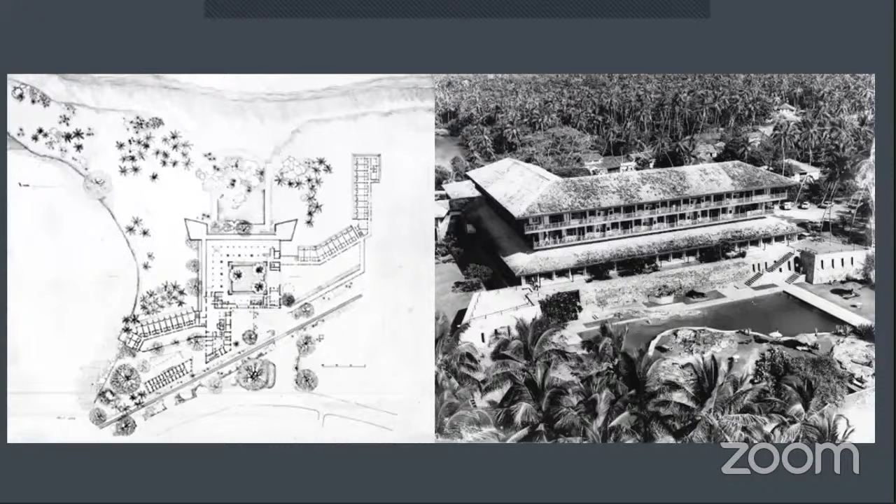Now, if you see this aerial photograph, this is taken from the beach side. This was the hotel that was built in 67 to 69. And it had a lower ground floor, which was connected with a ring of galleries. And what you see here, these protrusions were acting as bastions, like what you see in the photograph, stone bastions, and the stone bastions were connected with a ring of galleries right around.

And that ring of galleries was partly retaining the sand, because it created this upper platform. So this upper platform was supported by a ring of retaining walls, which also acted as the galleries, and these bastions were also designed by the architect as a feature.

So at the upper level, when you come to the hotel, you get down at the lower ground floor and climb up and get into the upper level, which is shown in this photograph. This is the upper level. And the two levels above, which is sort of an L-shaped building that you see in the photograph, were the residential facilities.

Also, you can see this original plan. By the way, this plan is 50-odd years old. The two room blocks that were there, the single-story room block, connected to the building. Right.

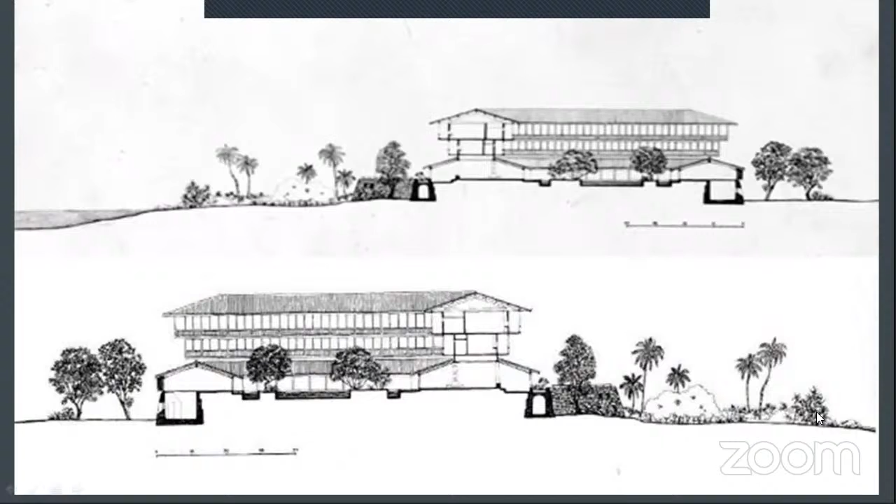Now, moving on, these are some of the old photographs of the building, again taken in the 60s. That same entrance that I showed you, the close-up. And you can see some light there. That is the entrance steps going up to the entrance lobby. You drop yourself at the lower ground level and climb up to the upper level, and from there to the guest area.

Another view of the same building. At a distance, you can see the stone walls, and you can see this cantilever of a cantilever effect on all sides. That was a unique feature which is maintained in this building.

We'll move on. This is another photograph of the old building. The single-story block, the room block that I mentioned, this is the place where they had it. And this is the main building again. And this is another aerial photograph that shows the river and the Indian Ocean. And this is the old Galle–Colombo road with a rail line here.

So these are all very nicely preserved photographs which we thought we'd share with you, from before it was developed. Right. Now, one of the last old photographs I'm going to share with you.

You can see this cantilever of a cantilever effect, but mind you, these are all timber-cladded concrete columns we had used. Timber cladded, very thin concrete columns. What he has done is basically suspended the cantilever, the slab here was held by these columns and taken to the upper level. It's beautifully done in a very creative way by, I think at that time, the engineers who were fixing it.

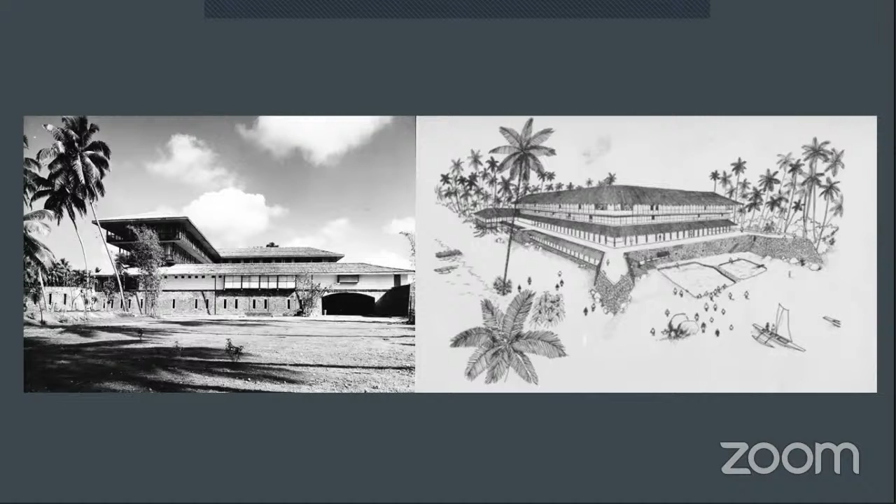However, we decided to rebuild, so most of the areas had to be taken off. Through rebuilding, we had the exercise where the architect started measuring the existing building and identifying each and every material that they had used - numbered, photographed, and documented. That was a quite tedious job. I will show you some of the things that they had done.

You can see the timber staircase, all the risers and treads marked and identified. And you can see this lovely copper handrail, it was protruding from a stone wall, which is again numbered and recorded. And this is a nice batik ceiling, the original batik ceiling done by one of the interior designers who worked with Bawa, called Ena de Silva.

He's no longer with us. And that was the ceiling that they used at the entrance, the batik ceiling - that's a very traditional Sri Lankan ceiling piece. So then measuring this was quite a tedious job.

You can see even things like window mullions, window sashes, the ironmongery, and this is one of the balustrades. And even these thin concrete columns that are with timber, so nobody could have seen it. So all that was numbered, measured, photographed, and documented.

So when this work was over, as-built drawings were done. There was another small issue at that time - we found grid-to-grid measurements were off. Now, we as engineers and architects always maintain certain accuracy. We found certain grids were off by a couple of inches, like 4 to 5 inches, some less, some more.

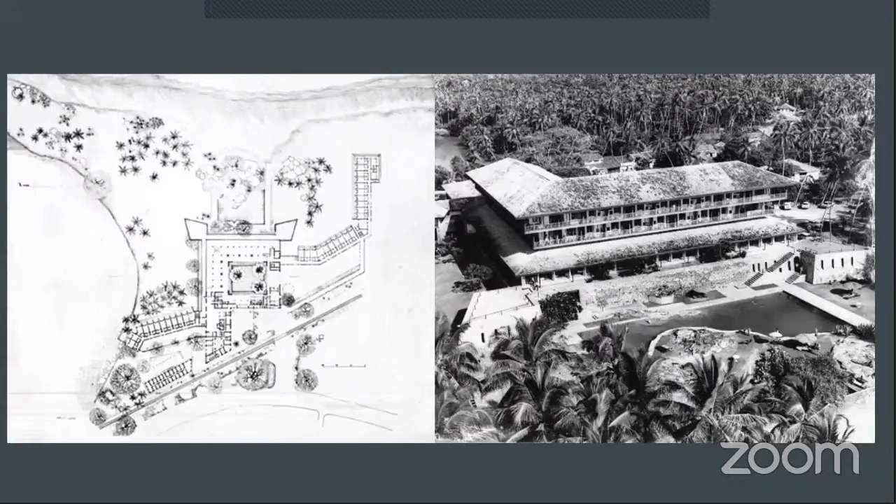Right now, the other thing you can see, if you look at the soffit of this staircase, it is basically a very narrow strip effect finish which they have done.

I was later told we never had plywood shuttering at that time. What they had done is they used a timber called arecanut tree timber, which is very flexible, very fragile. You can cut a small strip. He did the shuttering with these arecanut tree strips, put the reinforcement up and completed it, then removed the shuttering and found that impregnation of these tree trunks has come into this effect. I think it is not a uniform finish either.

He would have used the concept, the Japanese concept called wabi-sabi, where you don't finish a building to perfection. It is finished to a near imperfection. So I feel that he has used this theory. That's why you can see it's irregular, but it has a character.

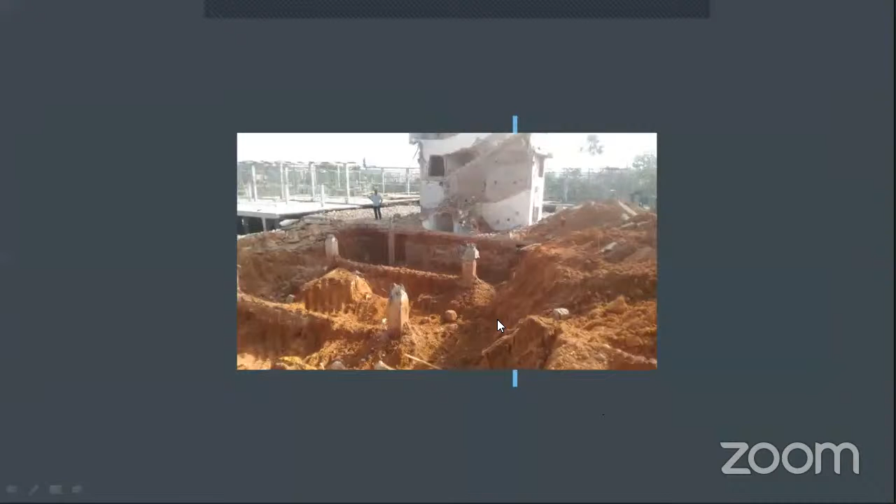So anyway, the structure started getting demolished one by one. And what you see here is the staircase core that we said we will retain. This is the 3-story building with cantilever effect, still empty. The structure partly got demolished, and the foundations were taken off. This is another staircase core wall that was retained, and the structure got demolished.

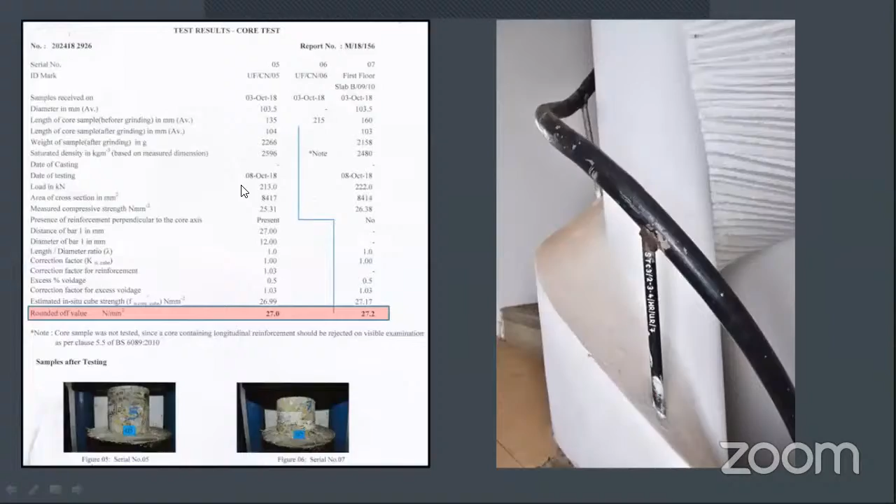Right, these are the terracotta wall partitions we had, retained at all levels. But the internal wall, that particular wall, was taken down and he made it into a double room, or what is called a suite.

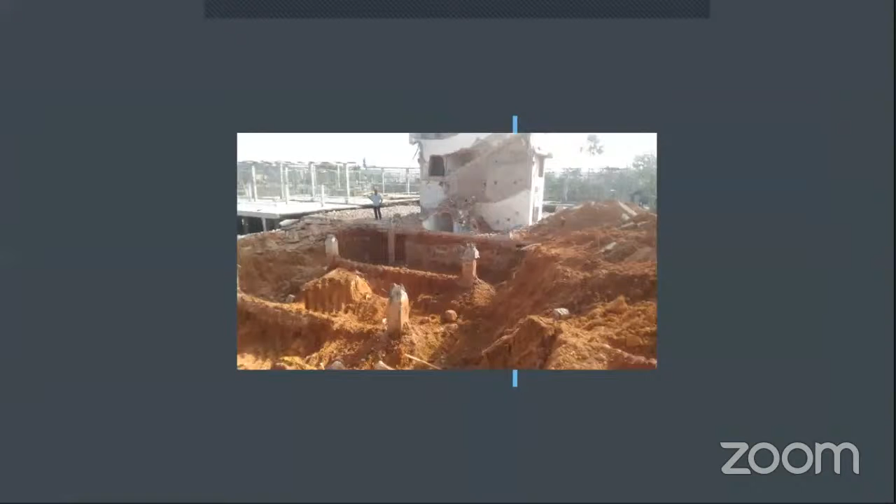And here we had this further cantilever. Now this is the upstand beam underneath you can't see, and this is the partition wall that he had, the terracotta partition wall. And now at the 3rd level, this slab was protruding. Again, he has used a 160 millimeter thick, small thin slab, and there was another floating column

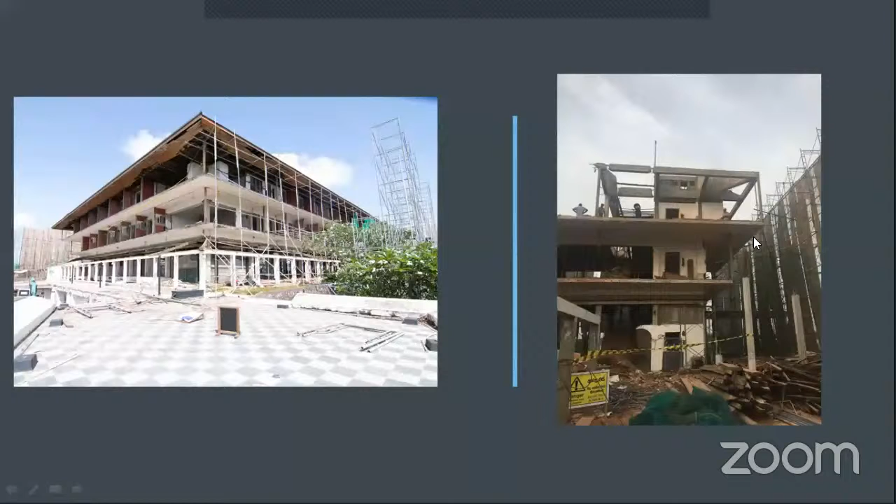If I show you, can you see, these are the original concrete portal frames we have, because these are the columns that we are talking about, hanging columns. That is how we have the column from the portal frame, and the slab load was taken partly to that. So underneath, you don't see it. It's like sort of a screen.

Then, with this new proposal of the architect, we were told that we can't have an upstand beam here. It's quite natural, you can't have an upstand beam in the middle of the room. And they said you can't change the structural characteristics also. It was a bit of a jigsaw puzzle. Then we asked, in that case, can we have a downstand beam?

Because they had a ceiling also. They said yes, but you can't take it out like last time. Last time they had taken the upstand beam out. They said no, you can't take it out. Now, with this limitation, 3 meters cantilevering with this thin column was not possible.

Then we asked, okay, if that's the case, this particular column that was stopped at the lower level, can we take it through the same 125 column, and we can suspend it. The step could be suspended with the help of these two columns, this column and this one, and the long beam connecting the columns.

So at that stage, we found this portal frame was quite a strong and solid portal frame, and we designed this particular slab in such a way that we had the two columns that are originally there, and these columns also. So it is suspended at 4 points, and there is a beam running lengthwise, also supporting the slab.

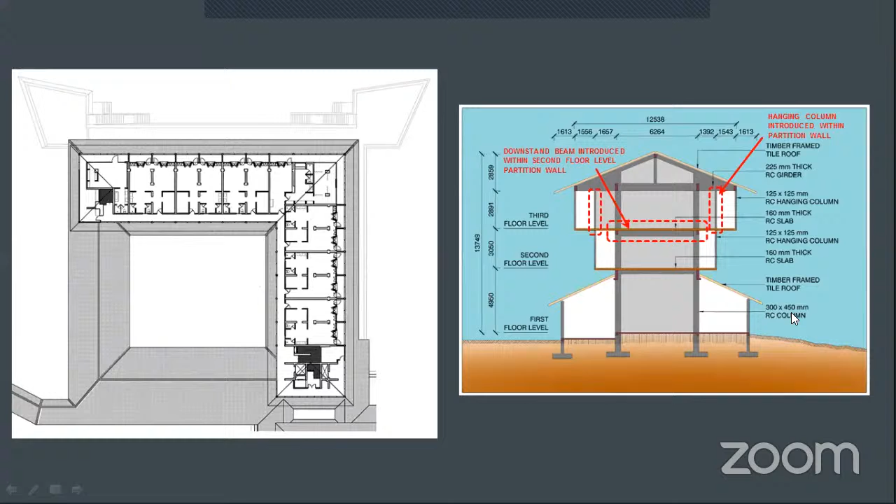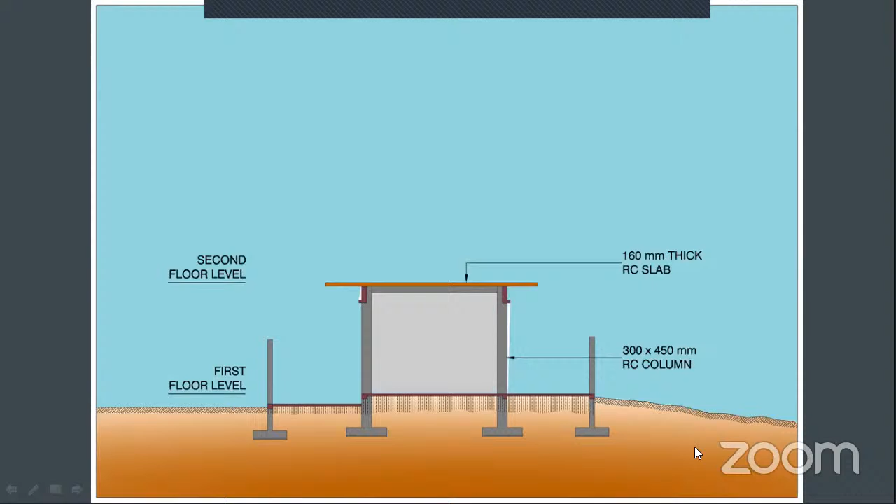Then we did the lower foundation part and the ground slab. The existing column sizes were maintained, 300 by 450. Then came the 160 original slab to support the roof. Then came the next level of column to the hanging column. Then the third level, 160 millimeter again, done with a new downstand beam. That's the only change we did, visually, without the ceiling, so that they can see changes from outside.

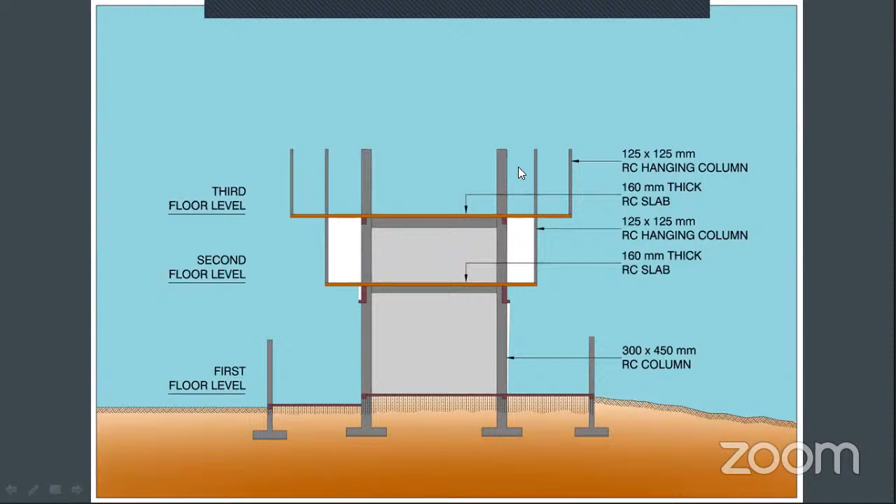Then we raised the columns to the top level, did the portal frame, and the roof came up. Everything was propped, and till the whole structure was completed and the load came, we did not want to remove any of these props, because finally the load was transferred. This column was hung here, so the load will be transferred to the portal frame at last. So till the whole thing was finished, we didn't remove any of the propping.

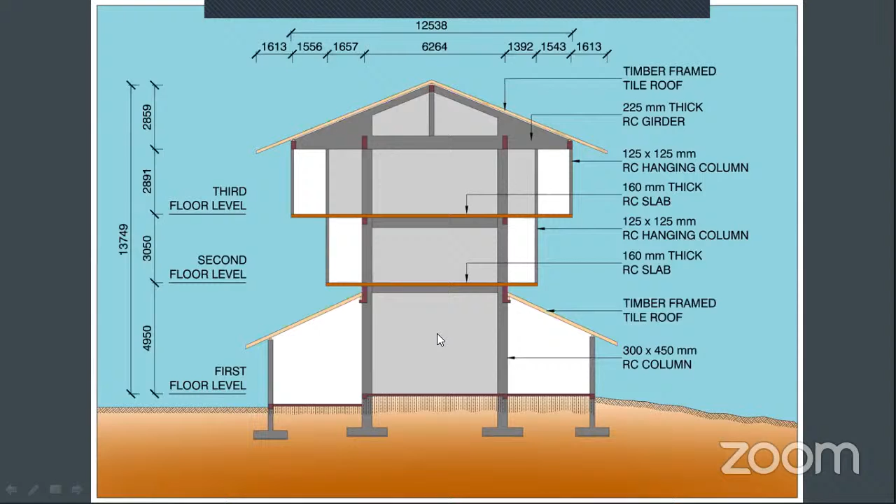Then I can show you some of the photographs during construction. This is the new building that was constructed. You can see the thin slab and the thin column.

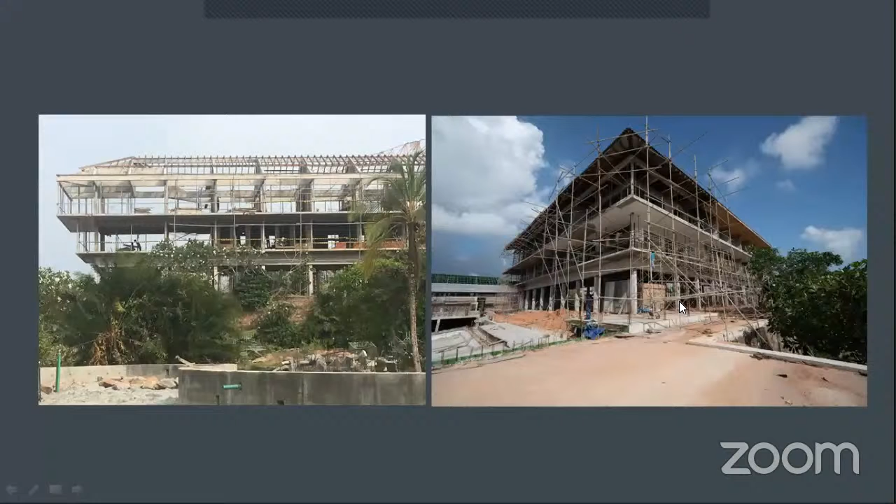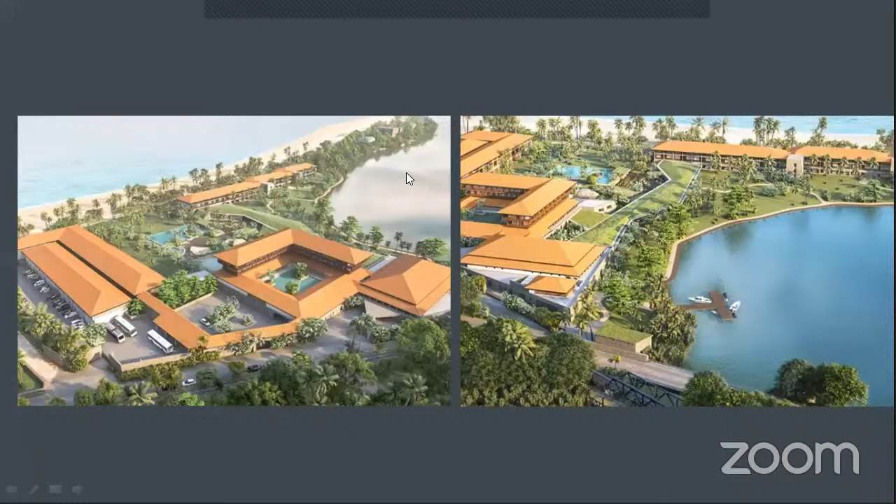Now I want to just show you the main project that we did. This is the old building that was reproduced the same way, and then added the banquet hall here, and the room blocks coming here, and the room blocks in the back of house. So it's quite a large hotel because earlier it was only small, but now a 150 room hotel.

Also, I must tell you, he did one interesting building. You can see some line here. It's the restaurant, specialty restaurant, and the all-day dining, all that was housed here. It's a single-story concrete structure with a folded concrete plate at the top and landscape at the top in such a way that you don't see any of the concrete from this building. So that was his intention.

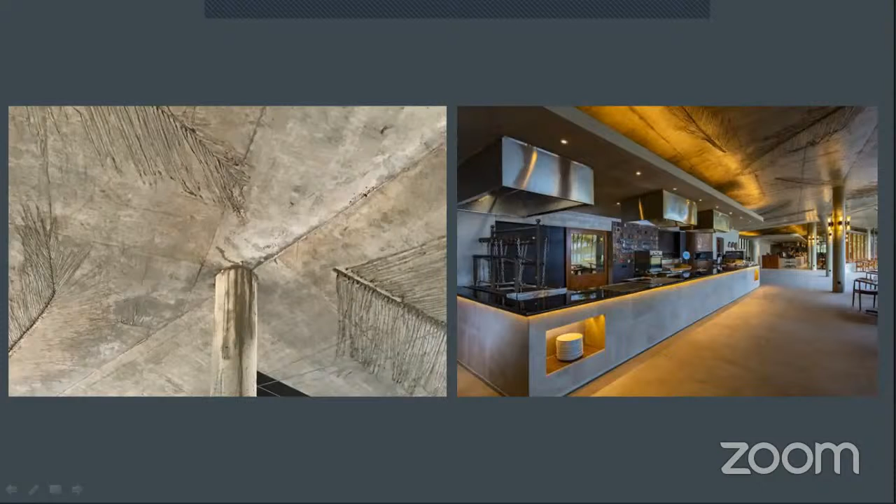And it was quite a nice soffit. It is just raw concrete, and finally he just polished it. And this is part of that building. I thought I'd highlight that part of the building also for you. And with that, we will conclude. Thank you.

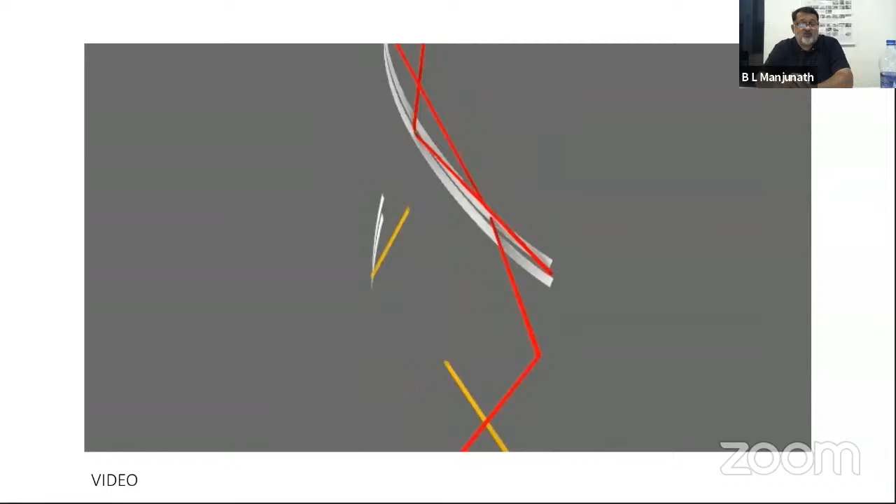So with this, I was looking at the skeleton. What could be the skeleton of a tree, or the skeleton of any living thing? I thought there could be a spiral, a constant spiral moving around the periphery, strutted by a series of elements which control this slenderness, and these struts are transferring the force to a skin outside through hoop tension, then you see a skin.

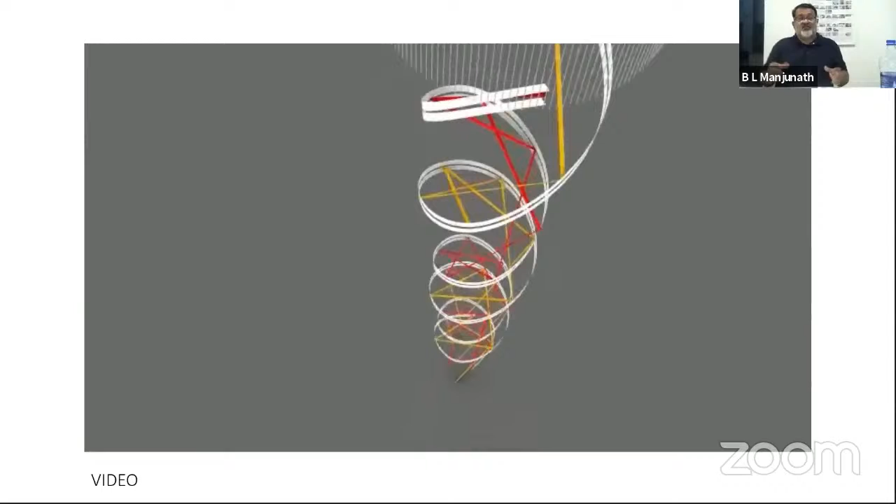This concentration is like a star to me. What you see on plan doesn't show in cross section. To me this can be a cross section of an energy, or it can be a continuous seamless force. What became curious to me is the beauty of seamlessness. There is no abrupt ending. It is continuous. It's very poetic.

It grips you. It takes you through. So this visual ability to see seamlessness in nature is curious to me now, seeing layering as seamlessness. Layering is fantastic. You have different layers moving independently to perform different duties. At a certain point it may be concentrated for a particular duty, but it may go and do some other duty. This layering of seamlessness is part of my thought process and part of my job. Next slide.

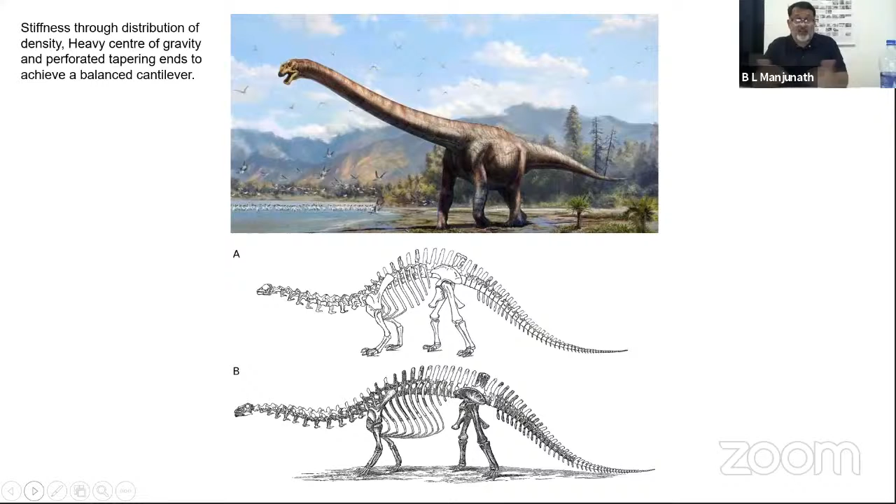Why can't we draw inspiration and build buildings? These are dynamic. These are moving structures. So why can't we do a stable structure out of these as inspiration? Because all these are available in nature, free of cost. Next.

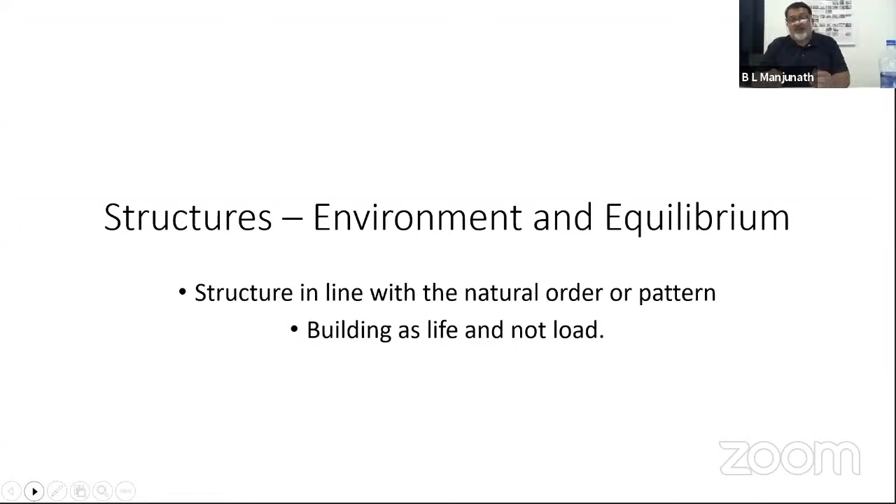So for me, see, finally, as an engineer, we are taught only three equations. That is sigma H equals 0, sigma V equals 0, sigma M equals 0. So you have these structures where the forces finally end up in the ground very safely. To make that, you need to have a seamless thought process of force transfer. Next.

I think the beauty is about looking at things. I think distilling what you see through free body diagrams will probably help you to understand it much better rather than looking at it visually without going into the depth of deciphering it. Next. So nobody understands that the buildings are the counterweight. Next.

And this is also very curious to me. When you look at these two sketches, these two sketches are very interesting to me. When you build a building on a hill, there is no horizontality, you can't build. So how do you create a building which is anchored normal into the rock or the soil or the slope? How do you induce more compression

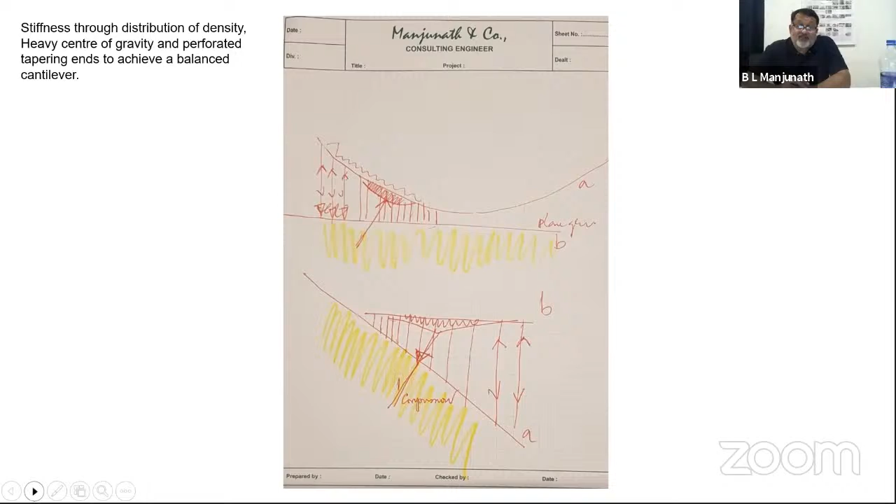He has very carefully positioned it in such a way that the maximum number of columns will come at the downstream, whereas very few columns, predominantly tension members, are at the upstream end. So I think it's structurally inspired. The residue is more structural. Next. So with this as the curiosity, I will show you some of my exploration, which is still work in progress.

I'm just trying out this logic of a concentration towards the ground, a fragmentation towards the sky, and then you also look at a surface. Surface is somehow a relation of compression and linearity. Linearity can also become more of fragmentation.

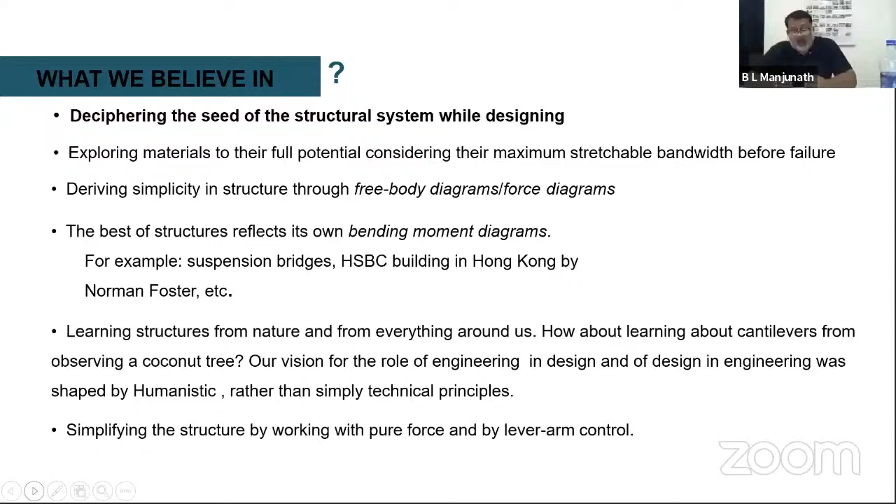and learning from nature and layering. Layering forces, rather than bending; to me bending is man-made, working with pure force is more. It is about seamlessness of thought process. So I thought, why not be layering elements, working with unstable elements to make it stable. A combination of unstable elements becomes stable once you combine it intelligently. So steel weaving is more like weaving steel mentally. That is what I was looking at.

So this was a small exercise about 5-6 years back, just trying, like a kid, how aluminum and wood can combine, what is the friction, what is the locking system, can we do furniture with this, can we do a building out of it. So, the whole element is suspended.

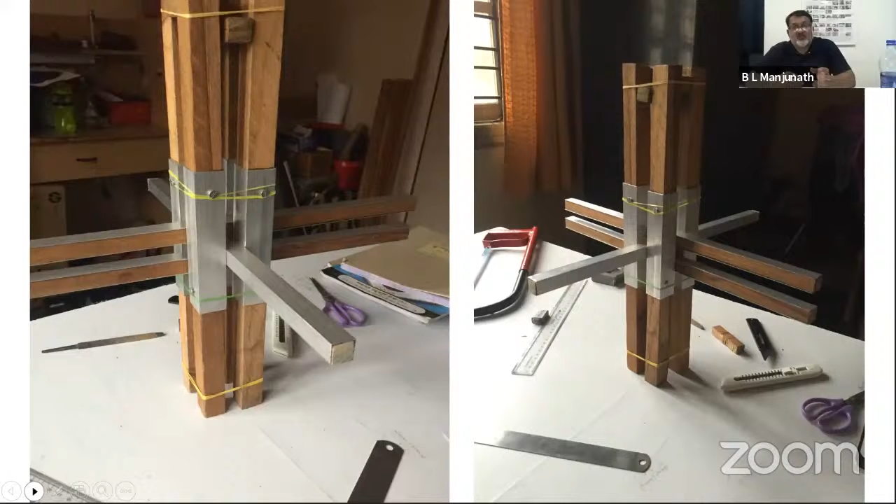How do you look at structures which are suspended, and if I look at a tree, the tree has a concentration towards the ground and fragmentation as it goes higher with leaves, and then a lot of animals stay in that. So why can't I do a building where this can be replicated as portals? So I did 3 portals in concrete, which basically are spaced in such a way that it is stable without bracing, and the profiles are done in such a way that it was independently stable.

And then we suspended 2 floors from the bottom and then had 2 floors on the top. So this medium of heaviness, which was anchored into the ground, held 2 types of structure. One is 2 floors of suspension. So when you do members in tension, it becomes so light, where you see, if I show you. So this is basically the 3 portals, what you see, okay?

And then you see the structure which is suspended so light, because the spacing is about 12 meters. It's 12 meters, and it's a very small site, which is about 5 by 45. So we have to create this so that you can park the cars below and then accommodate 2 light suspended floors, and then you create 2 more floors, because those 2 floors are the offices for him. So I'll show the next slide, which basically is the completed building.

You see 2 floors of office space and 2 floors of suspension, but the core, the anchor or the concentration is the portals. So the tree becomes a cantilever structure. Here it is a stable structure which allows these 2 elements to become spaces. Next. So we as engineers started trying out something where you can suspend the whole staircase. It's just to learn more.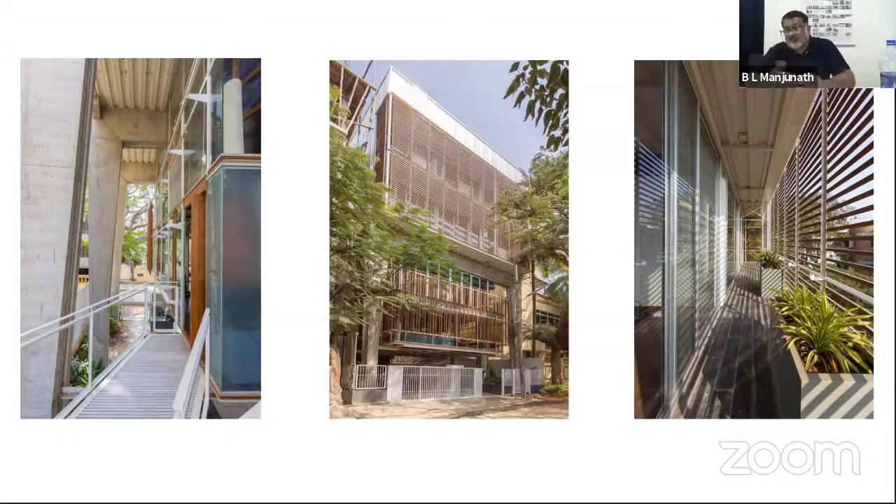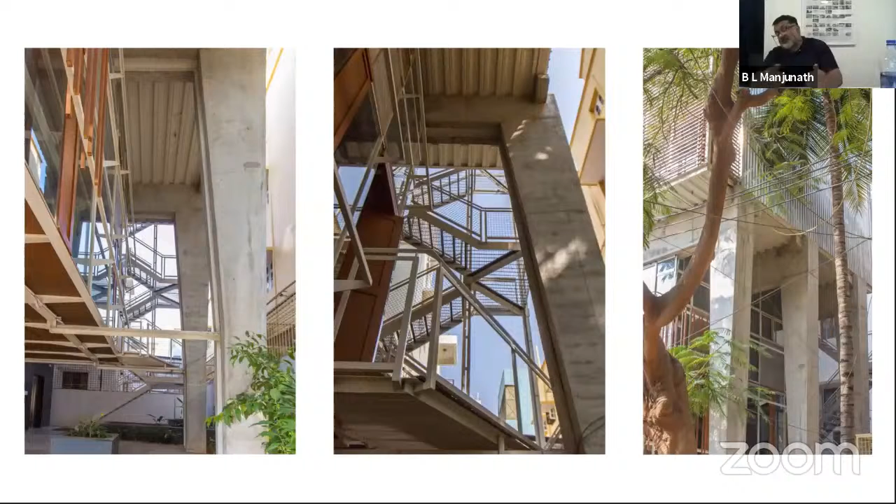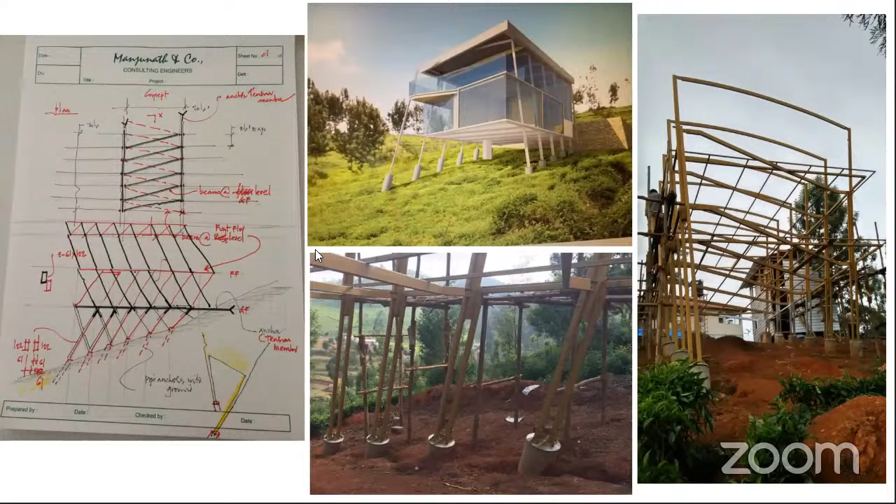A human being or a series of humans who are going to walk on the hill - it's all about balancing. How do you put the first leg and then balance the rear leg so that you can shift it and manage the center of gravity. The whole point on a hill is to manage the center of gravity so that you don't topple.

So we also tried the same concept through steel weaving, wherein we created two directional supports, which basically created a twist. A twist always makes it stronger.

I don't know, like in India, what they say is if somebody is slightly weak in mathematics, the usual way is to twist the ear, so that the brain starts working. This is like when you twist any material - suddenly it creates a stiffness which helps us. A repeated stiffness becomes even stronger.

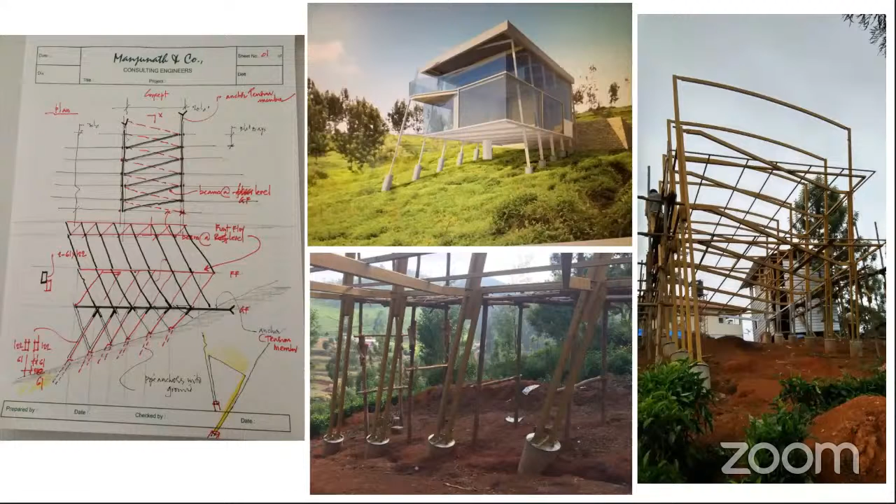So this whole structure is built with elements which are doing different things at different points of time, so there is no redundancy in the structure.

So these are - there's no welding at all, everything is bolted, and every overlap is worked out. It has vibration - once it is fully finished, the building becomes rigid. So it's more like...

A plant or a human being. You can talk to this building. This building, to me, is life. I can talk to these buildings, and what we create through buildings.

So these are some details which we - this is a small example of how it developed, what is a spring, how does this connect - some sort of architectural inspiration about that.

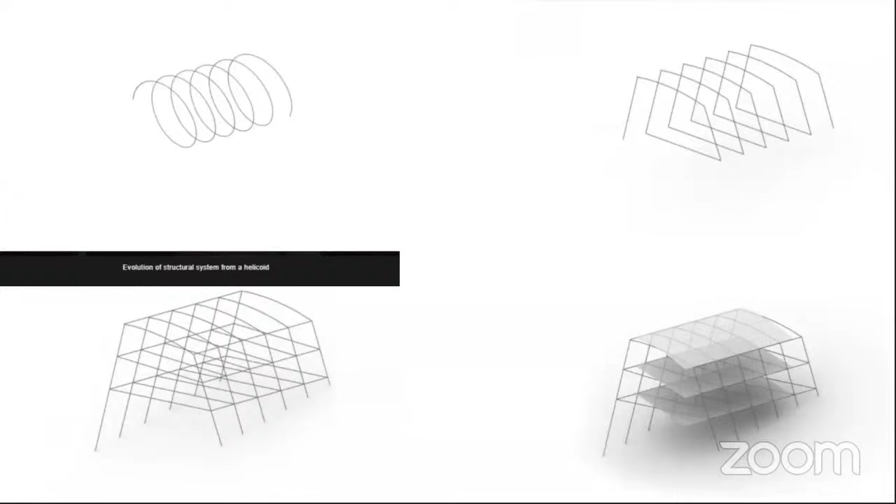These are a few images of this building - this is about 4 or 5 years old. It's a retreat, not in Coorg, sorry, in Kotagiri, it's in Ooty. These are some photos.

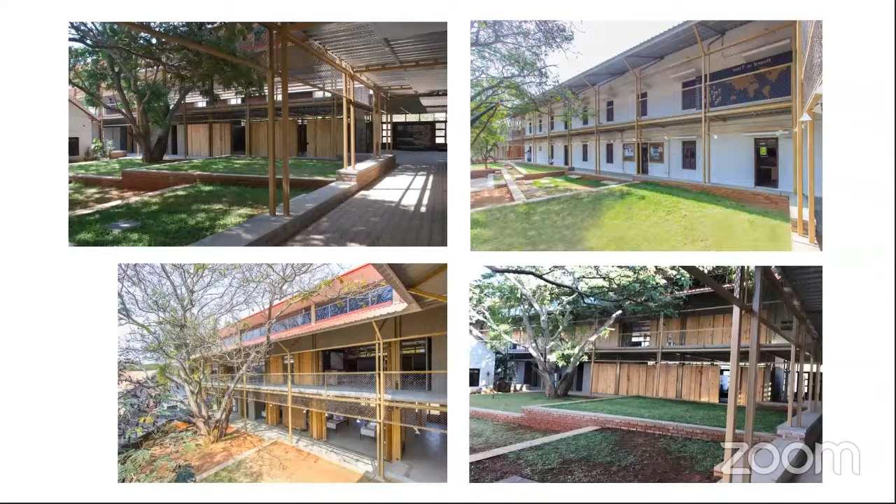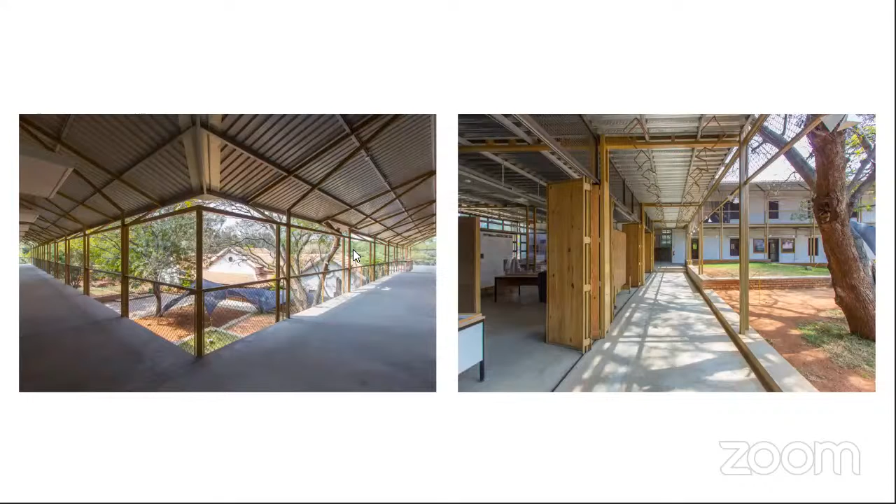You can show some of the slides here - I'm going a bit fast. These are some of the images of the school.

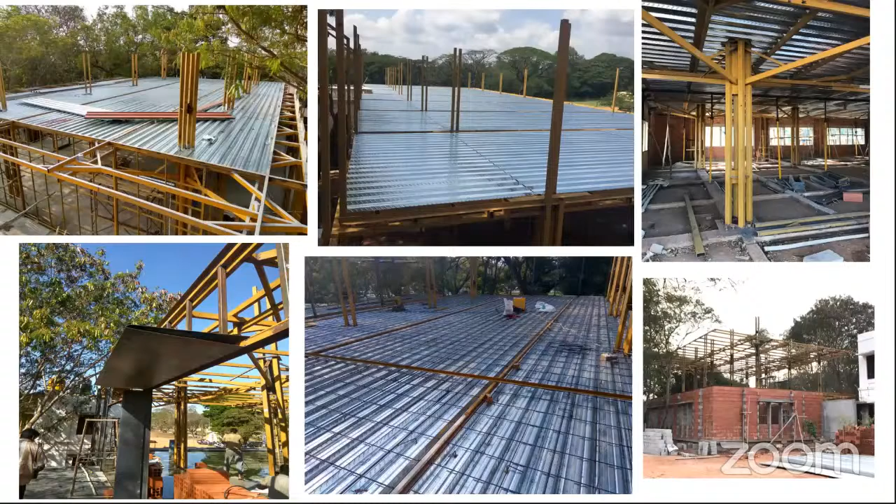This is also one of the buildings we've recently finished, a restaurant in Whitefield, wherein we played with simple angles to create channels. You create different elements because each element is a layer, but it is a combination - it has a particular cross section to take a particular force. So we build these sections and then work out the detail accordingly.

These are a few images of this building - this building is almost over.

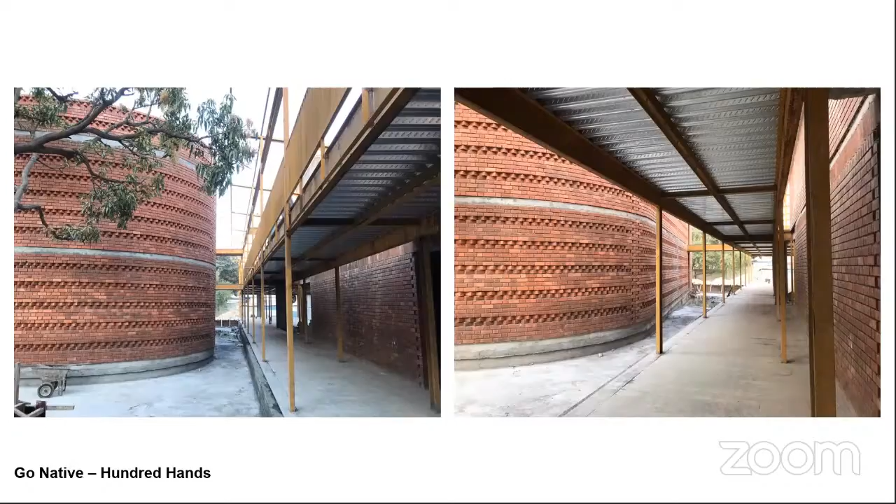This is very similar to what Deepal talked about - how do you make a structure with a capital support at the top and then suspend the whole building. This whole building is about a core, and the whole floor plates are suspended.

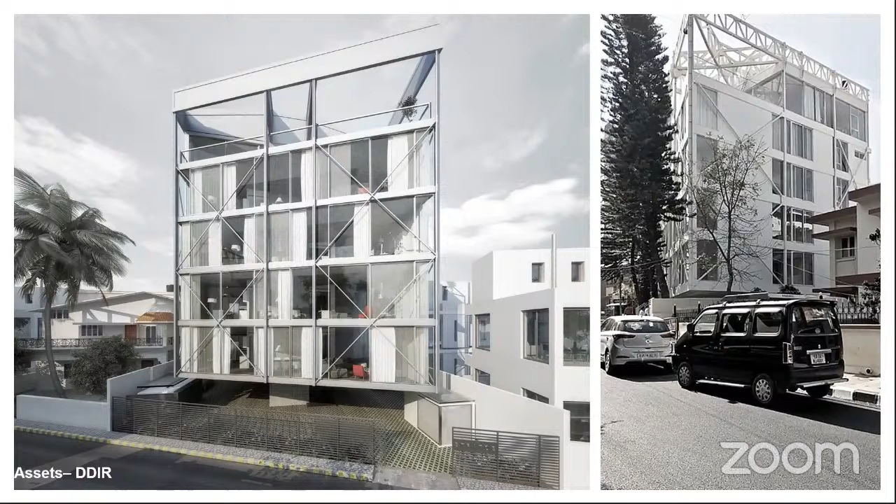If you look at this, it's a mushroom support - you have a lift and a staircase which is the RCC core, then the whole spread of the floor plate is suspended from the top. So you have a capital truss on the top, and then we managed to balance all the forces through bracing.

And tension elements. This is an apartment building which is finished, for a developer, in Cunningham Road.

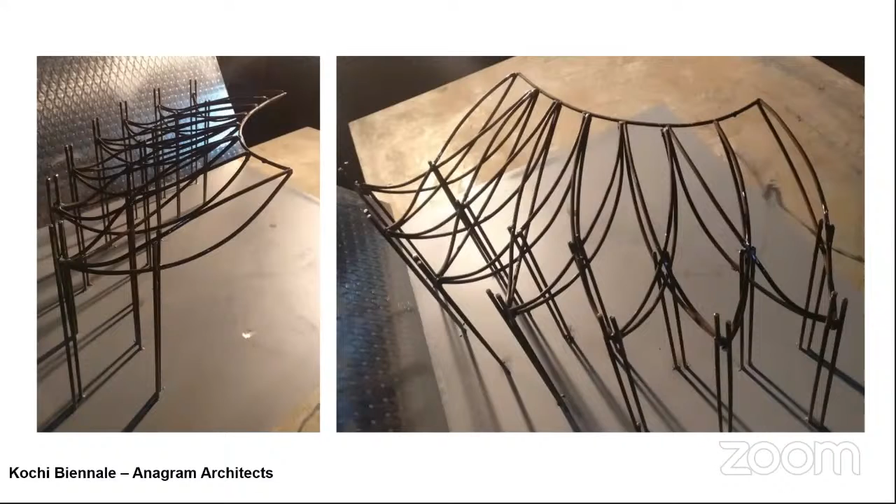What you create is an element which is more like strutting. You compress it, at the counterweight there's a lift, so it's about the material ability. The seamlessness of the material can be managed by applying compression or pulling it down. By the profiles you create a form. So this is just one of them.

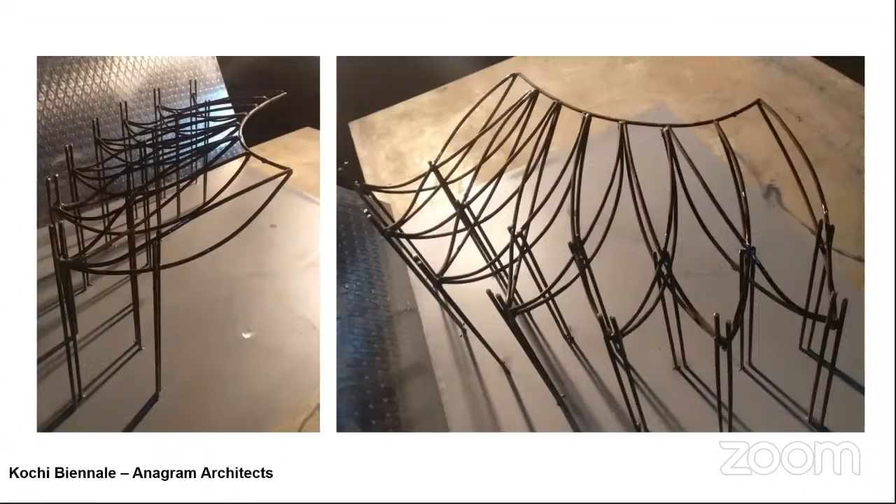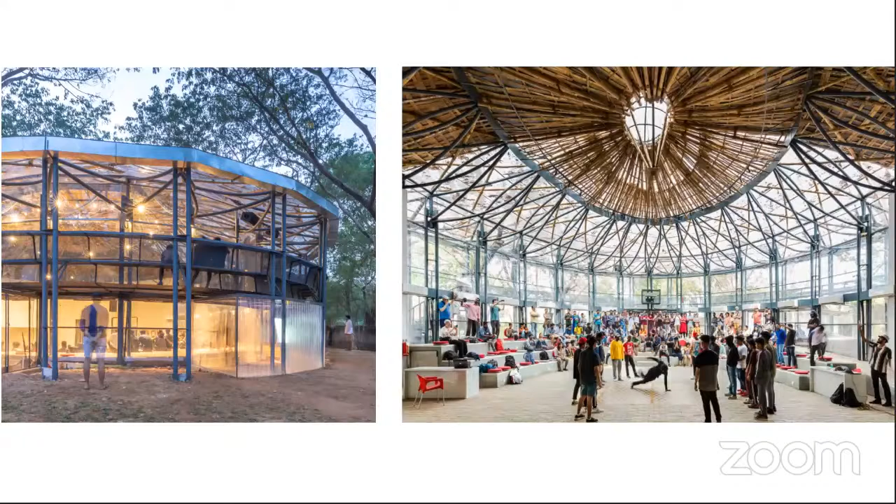So you can look at the whole structure, it's quite a large structure. The inside is filled with bamboo; otherwise it's totally a transparent structure. This structure was built only for 3 months at a very, very low budget, so we had to do it through a structural concept. Yeah, next. That's the next. Thank you.